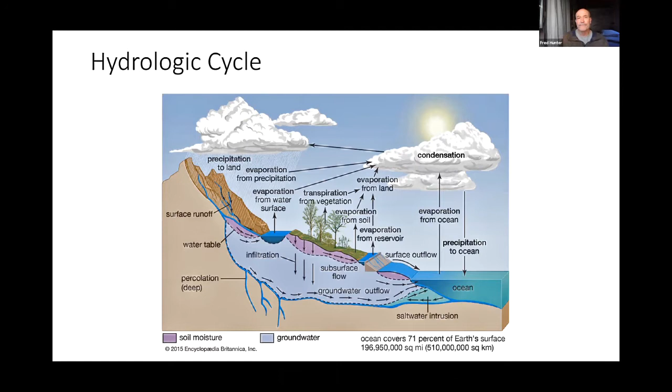So there is a give and take between the saltwater groundwater intrusion and the freshwater that's coming from the land. That's an important factor, and one of the reasons why it's so important for us to continually try to increase the amount of infiltration that happens in our urban settings. So let's go ahead and move on.

And again, I apologize for some of the quality of the images. These are just handy images lifted off the internet to give the concept that we're discussing. This one doesn't have great detail. It's kind of pixelated, but I thought it was a good image to demonstrate the discrepancy between urban environments and environments that have more natural ground cover.

You can see that in the area with natural ground cover, there's a great deal more infiltration happening. We get a lot more shallow infiltration, a lot more deep infiltration. In an urban environment, that is limited by the hardscape surfaces. So we're going to get much less water getting into groundwater, and much less natural evapotranspiration happening from plants and planted areas in a more natural landscape versus an urban landscape.

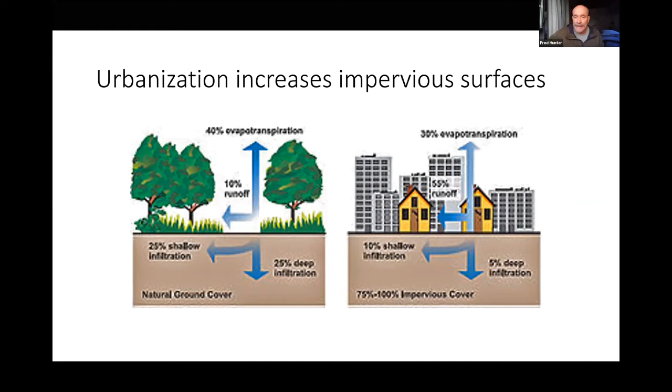This is another image that reflects the same sort of thing, but you can see that the urban area with more impervious surfaces ends up having more surface runoff. An area that is more vegetated is going to have more subsurface flow. And that's one of the key issues that we want to address with curb cuts: increasing that subsurface water and minimizing the surface runoff.

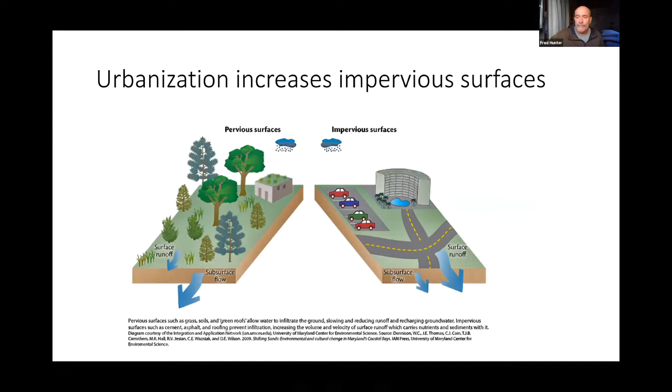So some of the downsides to urban runoff, and one of the principal things is the pollution that comes along with the water running off of our urban landscapes, our streets. There are hydrocarbons, oils, other car fluids that are going to be on the city streets that are going to run off. There's sediment, bacteria, pet waste, trash, this kind of stuff, fertilizers and pesticides from landscapes. All of these are going to be contained in the runoff and end up in the creeks and the ocean.

And that is one of the main concerns, is the water quality. And a lot of the rules and regulations that we're seeing come around in municipalities and counties and such are an attempt to address the requirements to minimize this pollution going into waterways.

Other downsides to urban runoff is flooding downstream. The more water is running off and the more quickly that's running off, the more flooding we can see in the downstream regions of a watershed, which is a big issue. There are parts of Santa Barbara, for instance, that are prone to flooding in heavy rain because they're the low-lying areas.

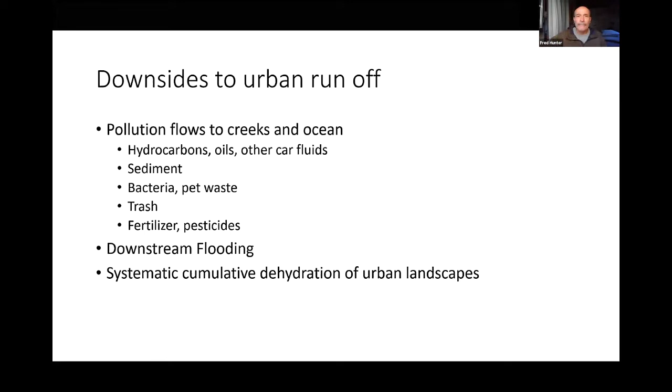Here is just a little video showing some of this runoff on Lower Salinas Street in Santa Barbara. But look at all the beautiful fresh water on its way to the ocean, carrying whatever pollution is there on the street right out to the ocean and into the creeks. And so clearly we want to try to do the best we can to put that water to good use rather than to just let it run away.

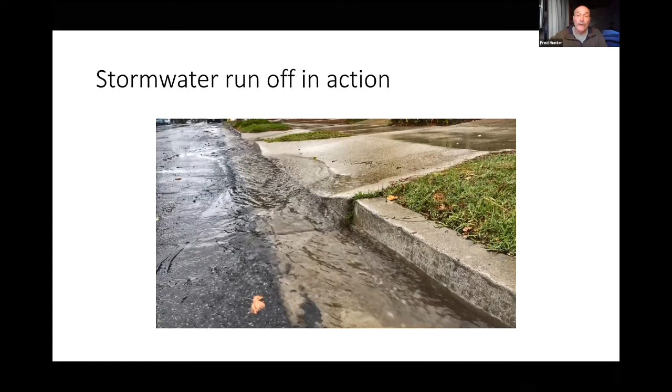So how can we turn some of that runoff into run on? Curb cuts are a very good tool that we have to help try and get things going in the right direction in that way. Our curb cuts increase the infiltration in groundwater. They're a way to also filter and treat pollutants.

And things that are in stormwater are much better handled in a terrestrial situation. They can be broken down more easily with bacteria and fungi in the soil than processed in a marine or aquatic environment. So it's really an essential thing to get those pollutants out of the runoff stream and into a situation where they can be mitigated by biologic activity and binding of soil. The soil is a much better medium for filtering water. It makes more sense to do that than to release it to the ocean.

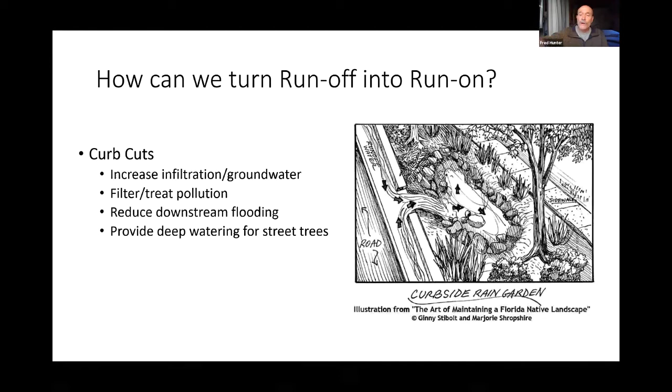We're also reducing that downstream flooding, and we're providing deep watering for the urban landscape, for our street trees and things that really desperately need that water. So these are the things that curb cuts can do for us. And I thought it'd be interesting to look at some of the volume considerations, just so we have an understanding of what kind of volume of water we're talking about.

It is really quite extraordinary. 1 inch of water over 1 square foot is 0.62 gallons of water. If you see the little 1 square foot cube over there on the side, imagine that to be 1 inch deep with water. If you could pour that 1 inch of water out of that cube, you'd have 0.62 gallons of water. So 1 inch of rainfall is equivalent to 1 inch of water over every square foot. So typically in a 1 inch rain over 1,000 square feet of watershed area, you're going to get 620 gallons of rainwater that falls on that 1,000 square feet.

We can extrapolate upward to the size of an acre. Over an acre, that comes to 27,000 gallons of water over 1 acre in just a 1 inch rain. I thought we could look at the 21.09 square miles of Santa Barbara, that's the official size of the city of Santa Barbara. In a 1 inch rain, that's 369,532,382.7 gallons of water that falls from the sky over the city of Santa Barbara. It's a huge volume of water.

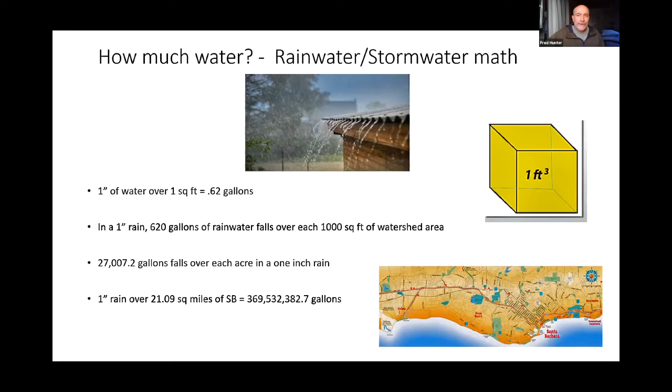So that's not considering the other areas of the county and Goleta and Carpinteria and everything; that's just the city of Santa Barbara, just looking at the city limits and the geographic boundaries of the city of Santa Barbara. So we're talking about an enormous volume of water that falls every time it rains. And so we want to be doing our best to capture that and get that into the ground as best we can.

So obviously our streets and roads are an enormous impervious surface that is an opportunity for us to capture water. These are some statistics from Brad Lancaster, our friend and colleague who's been a pioneer in the area of run-on capture for a long, long time. A 10-foot wide paved street will drain 27,800 gallons of water for each mile of street. And those are actually conservative numbers listed here. These numbers actually represent 85% of the actual water that falls.

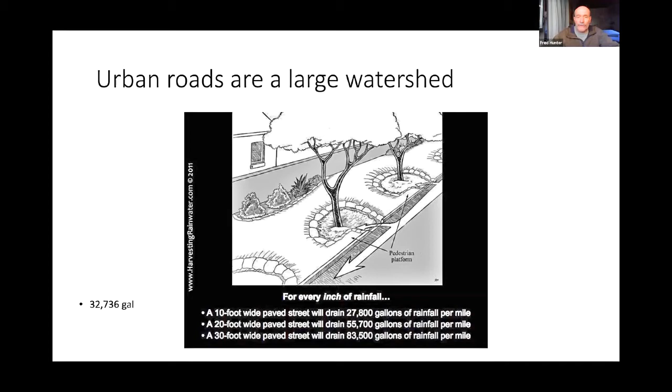There are some inefficiencies: surface areas may absorb some, water may go down cracks and not actually end up running down the street. So Brad's attributing an 85% efficiency to this collection of water off the urban roads. So these numbers are actually perhaps even a little low for the volume of water that would be generated realistically in a 1 inch rain over a certain length of city street. So we're talking about large volumes of water. So great opportunities exist in those numbers.

So curb cuts are a very simple way to divert some of that water that's rushing down the gutter into the landscape and provide it a place to pool, to slow, spread, and sink into the ground. So this is just a little simple diagram of a curb cut, to give you an idea of what a curb cut might look like. But let's look at a whole bunch of examples of curb cuts from around the country, around the world, to give us an idea of what variety exists in the way of what's possible with curb cuts.

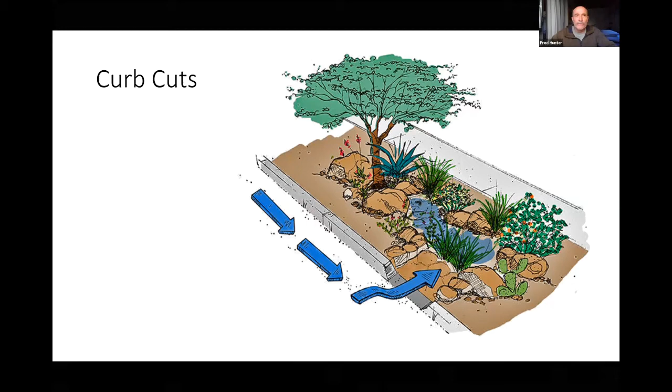This shows the execution of a curb cut. There's someone with a concrete saw actually cutting the curb. You can see the basin has already been excavated where the water will flow off of the street. And it's interesting to see that in process, to see the depth of the basin. You can see what large capacity exists there to accommodate lots and lots of water as it runs down the street.

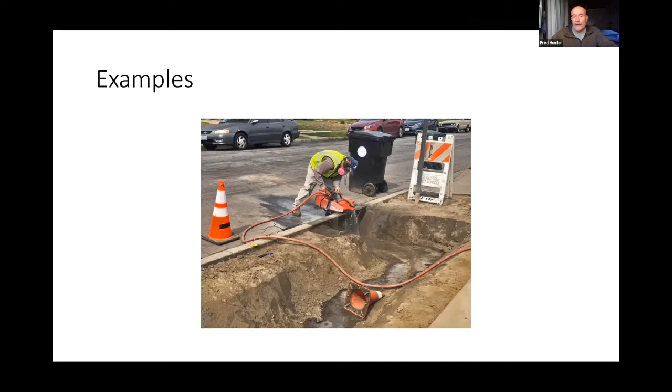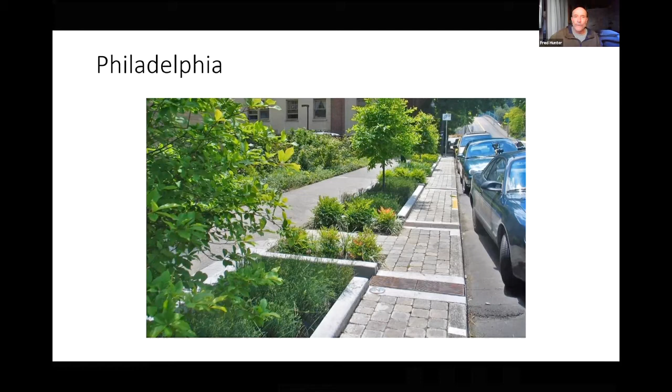And in this instance, they have used metal grating to cover the channels that convey the water from the gutter into the curb cut basin. And I even noticed in this example, there are some little asphalt berms they've built in the gutter to add a little dam, if you will, that will divert more water into the basin than if that little asphalt berm wasn't there. More water would just rush past, but they're increasing the diversion into the basin by putting a little bump in the street to enhance the capture of water into the curb cut basin. So that's Philadelphia.

This is another one from Philadelphia. You might notice too the little cuts there on the sidewalk side. They've got a zone of permeable brick paving there, but they've also left cutouts on the sidewalk side for water that falls on the impermeable part of the sidewalk to flow into the infiltration basin as well.

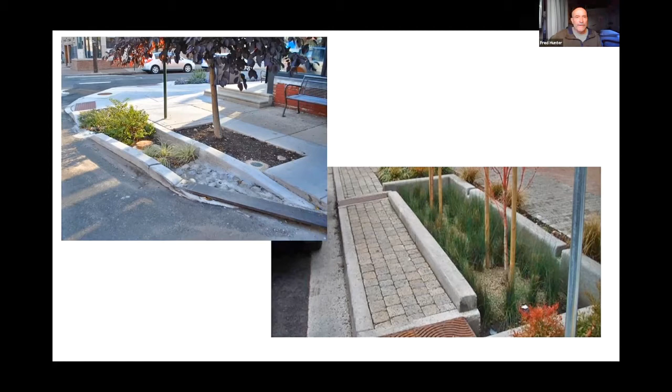Here's a couple of other examples. You can see how deep the basins can be. And again, notice the cutouts on the sidewalk side there, allowing water from the sidewalk to flow into the basin as well. And things can be very beautiful and quite enhancing to an urban environment.

These are images from Portland, and a couple of basins there. Again, it looks like they've used permeable paving on the sidewalk. But the lush growth in the basin is a testament to what a vibrant soil ecology is going on in that basin.

And this is something we probably would talk about a little later on too, but it's evident that the more growth, the more lush living plants there are in the soil, the more roots, the more the soil biology is active, the more capacity the soil has to infiltrate moisture. So the planting is a very important aspect and something that makes the system more regenerative in that it gets better and better over time. Its capacity increases with time.

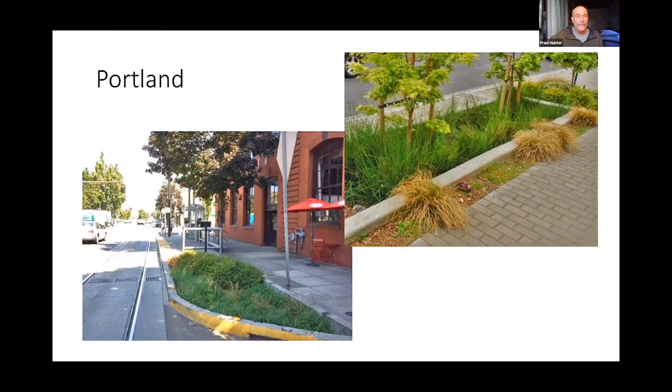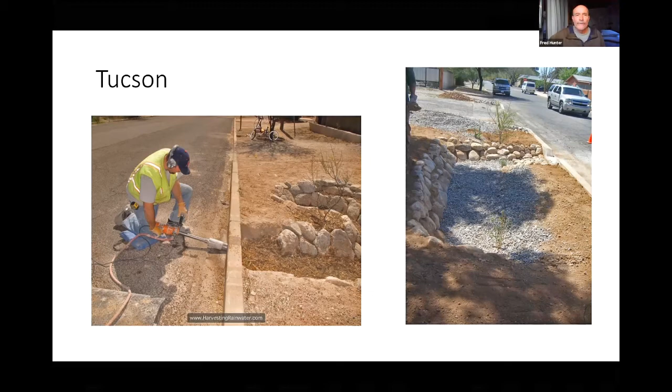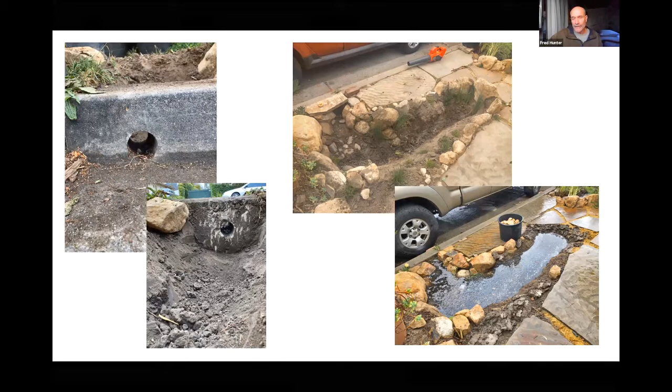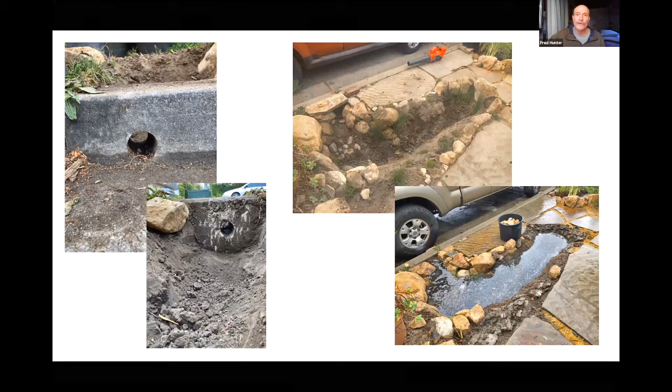Actually, I think this basin was under construction when there was a rain. The rock work around the basin had not been completed before the first rain came, and the first rain came and filled the basin right up to the brim with water. So the upper shot shows some of the construction of stonework around the basin, detailing it out after that initial flush of water had already been infiltrated.

I think these are shots of that same basin. You can see how once the basin is mulched and planted, it has much less of the effect of being a giant bathtub and more just looks like a lovely landscaped area rather than being a deep, bathtub-like basin. It looks more just like a lovely landscape.

Couple more shots of beautiful curb cut basins in urban situations, and you can see the capacity is quite large when it's well designed. These features can really take in a lot of stormwater and process and clean and infiltrate large amounts of water. And if they are repeated consecutively throughout an urban area, they could certainly make a huge impact on the amount of runoff being discharged to creeks and to the ocean.

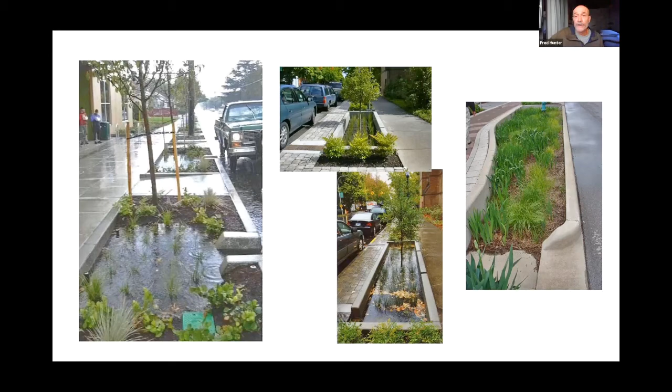So there are some aspects we would want to consider with potential curb cuts. Barbara, did you want to say something?

Yeah, I just want to emphasize the role of curb cuts in preventing or mitigating downstream flooding, which we have seen has been an issue in our community before. And I think that this is part of the solution to that in our community. And I think it's something that we should really rally around for that reason also.

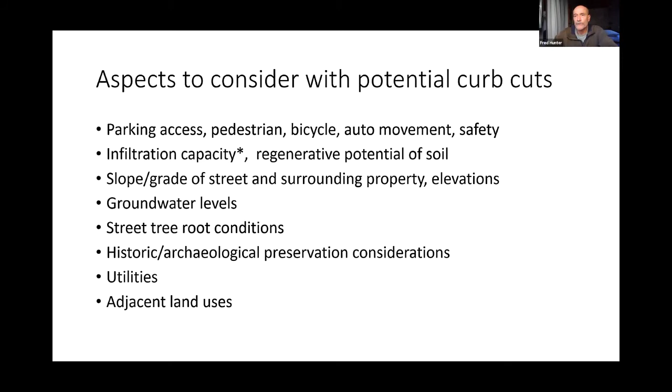So the current design standards, I don't know, Barbara, did you want to talk about this? Yeah, I can talk about that. I reached out to different government entities about current design standards so that we would have the most current information for the webinar. In Carpinteria, they don't have standards for public works construction, but curb cut designs, if people want to do them, are evaluated, and it would be a custom design case by case. The city itself has not done any curb cuts in the public right of way, but they have done some in parking lots. So anyway, this is a place where community input could be helpful in creating both the desire and the actual implementation of more curb cuts in the public right of way.

In the city of Santa Barbara, there is currently a draft of city standard details for curb cuts and bioretention planters on city streets. And I believe in a couple months they want to finalize those, so they're welcoming citizen input on those. And there are city departments that are actively installing curb cuts in select locations. The Creeks Division has been doing curb cuts for probably 4 or 5 years in different locations. I know that there's one on Carpinteria Street, and there's some on Quarantina Street. And they are actively asking people to notice where there might be good opportunities to do curb cuts and let them know. So there has definitely been a shift in the regulations about curb cuts in the city of Santa Barbara in the last 5 years or so.

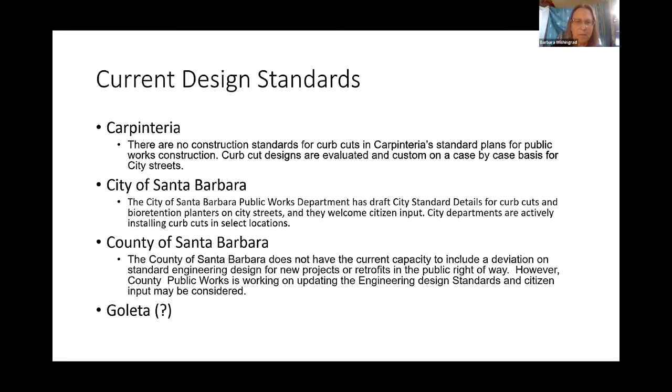Let's see, somebody has asked about how to store rainwater collection, which is a general question, not specific to this webinar. And I suggested that you can reach out to us at info@sweetwatercollaborative.org, and we can communicate with you about that, or also look on our website. We have a lot of references about that.

The second half of the question is, do you need city permits for curb cutting? And yes. And what more do we want to say about that? I'm not sure where you are, the person who asked this. Sounds like you're in a city. So you would go to Public Works.

And let's see right here. Okay, you're in unincorporated Santa Barbara County. Thank you. So my understanding is that you cannot do curb cuts currently in unincorporated Santa Barbara County, but you can reach out to the county to try to get those regulations changed.